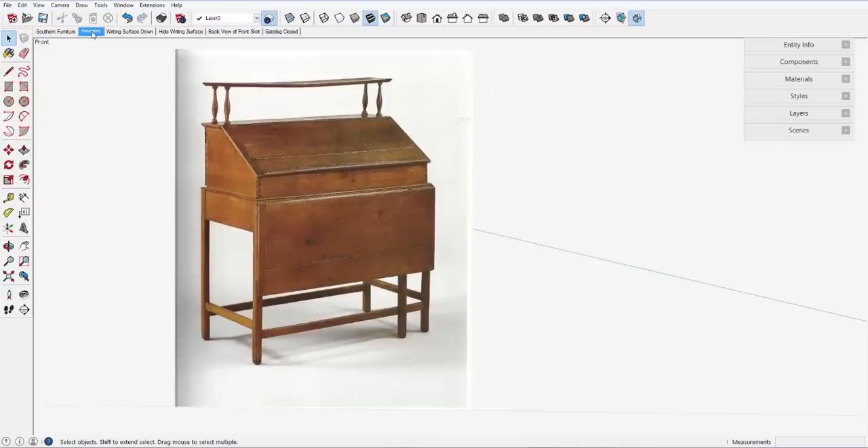I attended this year's Colonial Williamsburg Conference, Working Wood in the 18th Century. This year's subject was desks, and the conference leadership, cabinet makers, and joiners presented 5 different 18th century desk styles. One of these was an early 1725 Virginian desk on frame, and here is a picture of that piece from the book Southern Furniture by the Colonial Williamsburg collection.

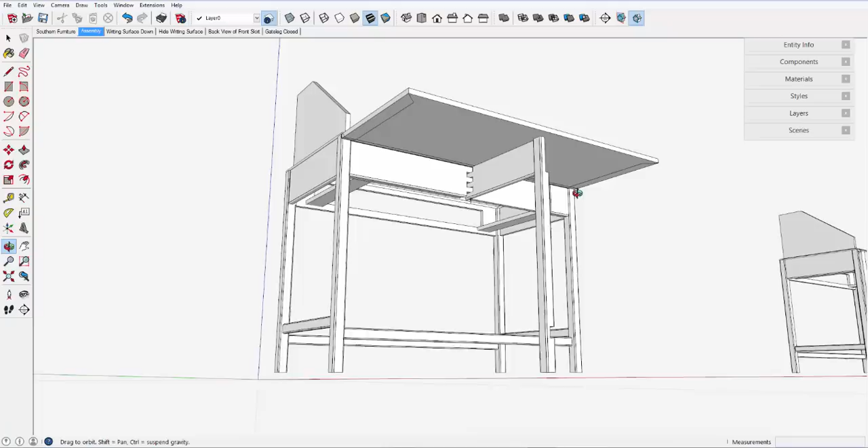Now, coming back to my three-dimensional model that's not complete yet with the upper section, I've worked trying to get the stand built. There's quite a bit of joinery involved here, and this gateleg, swinging gateleg out with a wooden joint in the middle. I'll concentrate on that a little bit later. The writing surface is quite big.

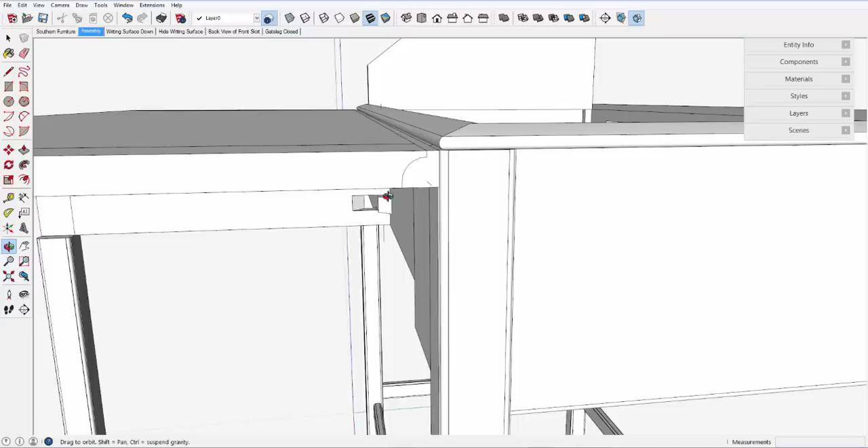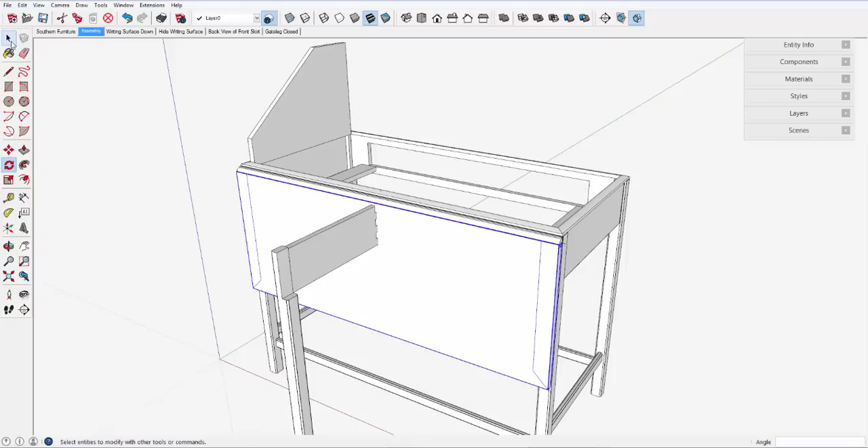Let me just drop that writing surface down. I'll select the writing surface. This runs on a rule joint, and I pick the rotate tool and bring it down to a vertical position right through that open gate leg, which obviously we can do in the computer. I'll swing that gate leg a little bit later, show you how that works, but first I want to hide this writing surface because it covers so much of the construction.

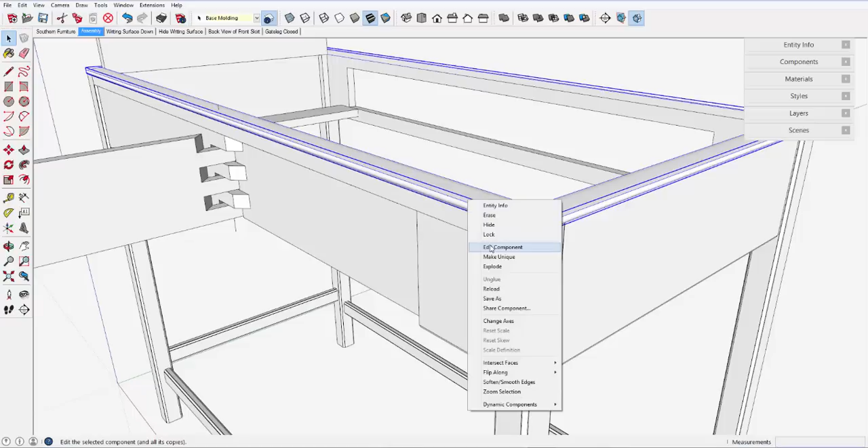There's this rule joint molding, as you can see here, tacked on the front. I'm going to hide that temporarily. And then there's this frame, this molding frame, in which the top of the desk fits, and I'll hide that temporarily, and I'll hide this filler material that the rule joint molding fastens to.

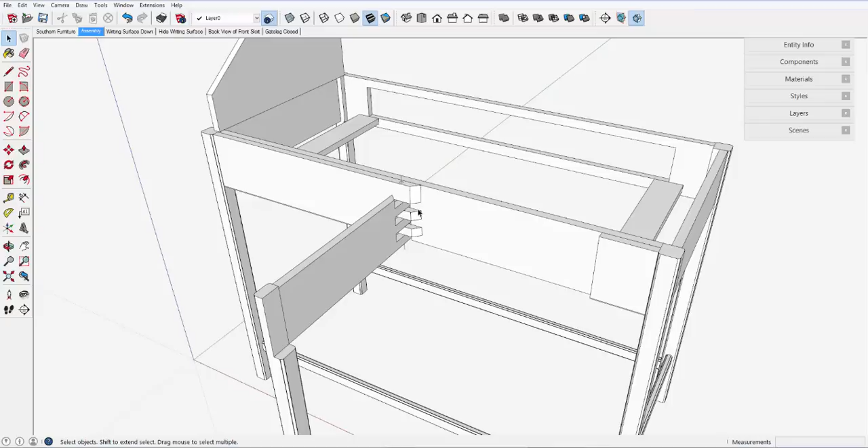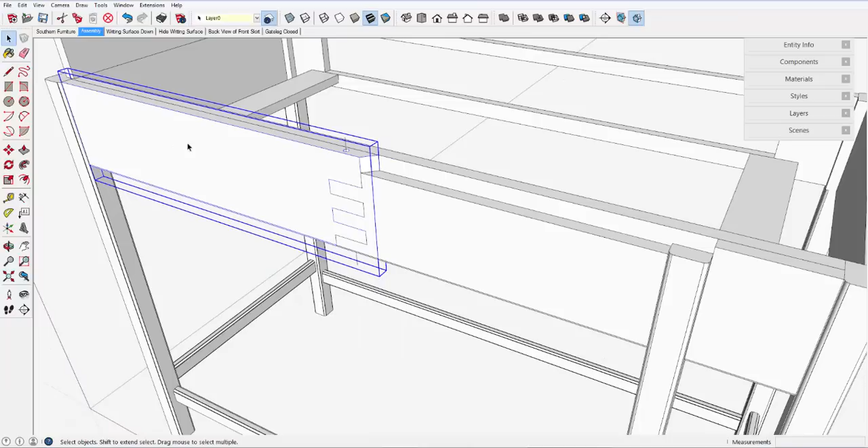And you can see the front rail or skirt, the solid skirt that goes all the way across from leg to leg, and then this hinge, this wooden hinge that works a little bit differently than other wooden hinges that I've made that are more circular. This has these fingers that protrude out, and in a closed position you can see how the gate leg fits underneath the writing surface.

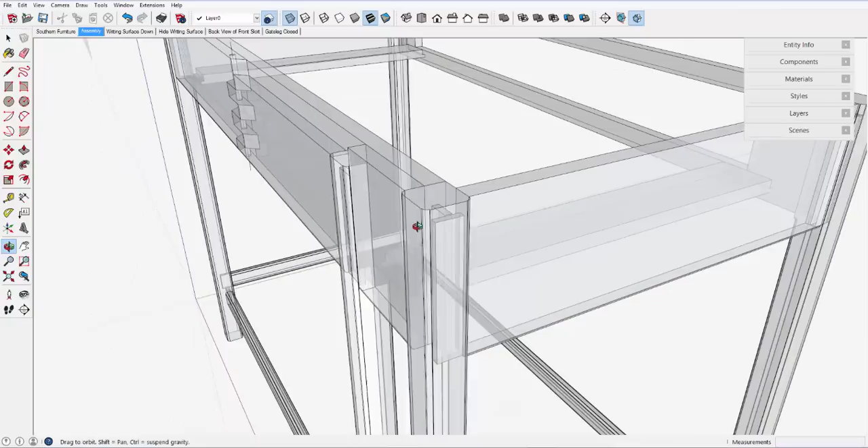Turning on X-ray, you can see some of the mortise and tenon joinery in the legs. It's pretty crowded. There's not much room in the sizing here to work in the mortise and tenon joints. And here's the X-ray of the

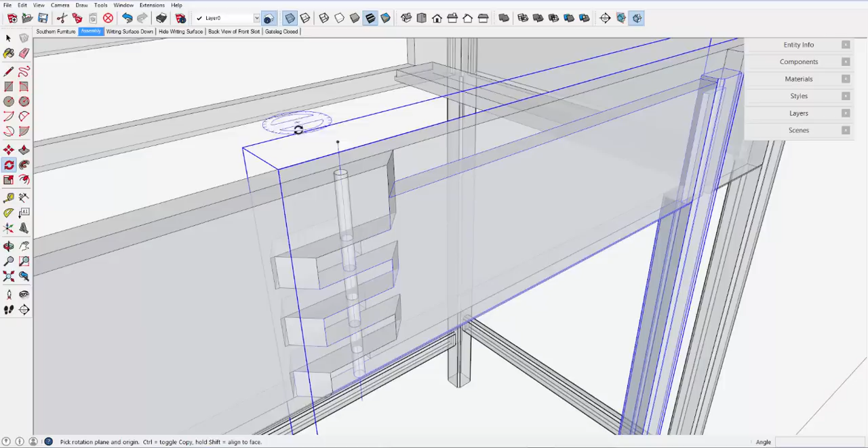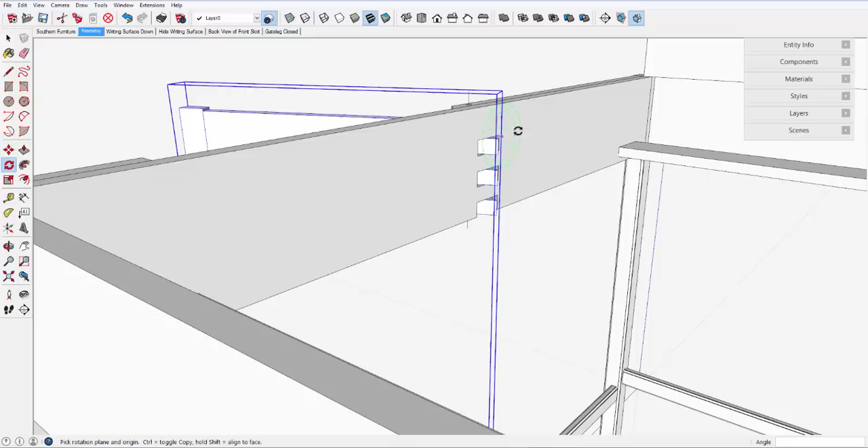hinge, the wooden hinge. Again, I'll pick the rotate tool, open that up, and the fingers are actually protruding through the back side. That is, the full-length rail has gaps in it. Here you can see where the fingers actually ride through. Quite unusual, for me anyway, type of wooden hinge. I'm more accustomed to the hinges that are more knuckles rather than fingers.

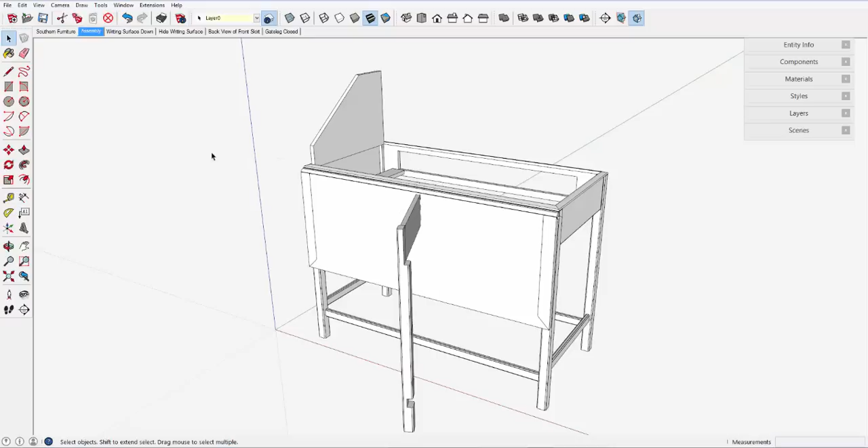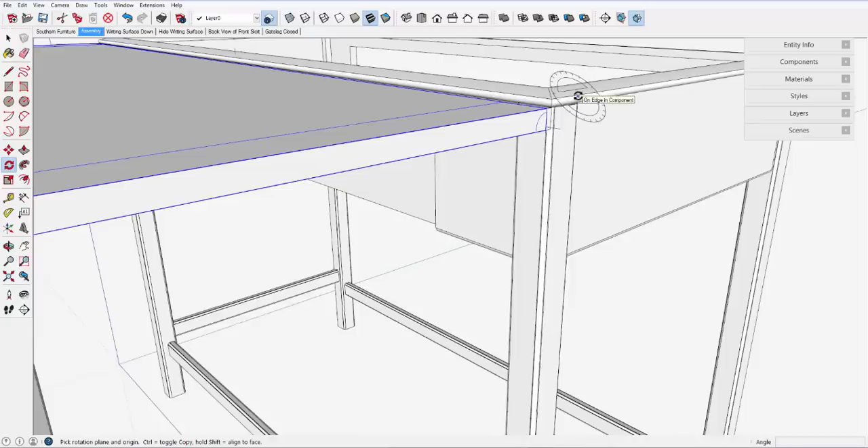Now, let me just again rotate the writing surface up on that rule joint. The top of the cabinet, which I haven't modeled yet, is full of pigeonholes and small drawers and a hinged lid. So I'll work on that later.